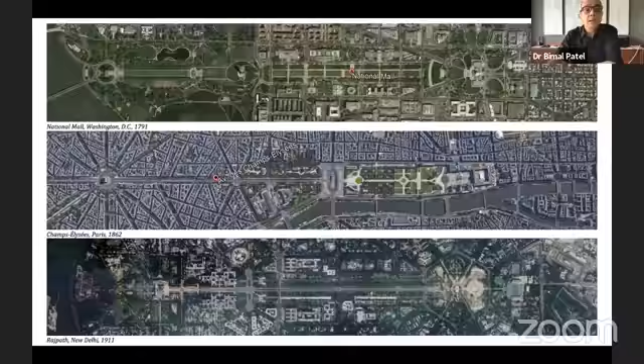The architectural device that the architects used was a standard Beaux-Arts device: set up an axis, with a processional route in the middle. There are gardens on the two sides, these are the flanks, with a focal point at one end and a termination point for the axis at the other.

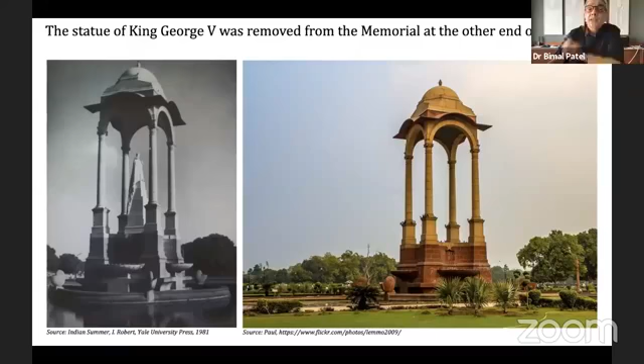North and South blocks started housing the most important ministries of the government of India. And that is how Central Vista became an icon for the government of independent India.

Now, second, the post-independence management of the Central Vista. Though this was a terrific architectural achievement, after independence, the incomplete parts of the Central Vista were developed haphazardly, without a comprehensive vision and without an inspiring architectural vision of what this place could be.

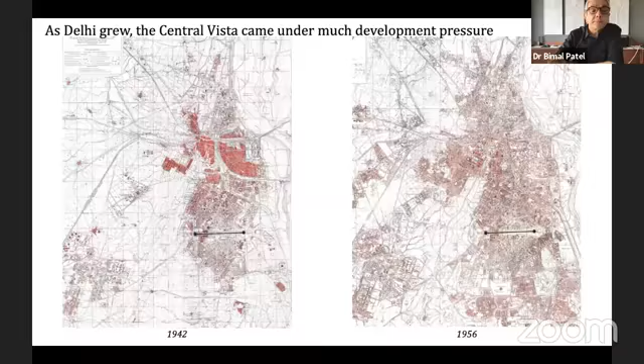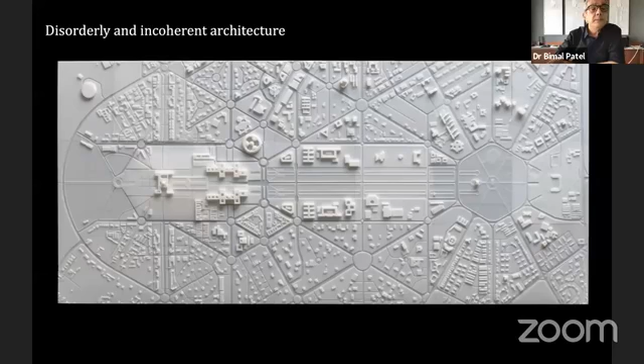If one were to look at the Central Vista today, it's quite clear that the development on the two sides is disorderly and incoherent. The architecture is disorderly - the grand symmetry set up by Lutyens has been violated in many different ways. All the buildings are different from one another, and the overall architecture is disorderly and incoherent.

This place was meant to have all the offices of the Government of India, but less than half the ministries of the Government of India are actually located within the Central Vista. The rest are scattered all across the city. You can see these yellow dots scattered outside. Inside the Central Vista, there's only 22 out of the total 51 ministries.

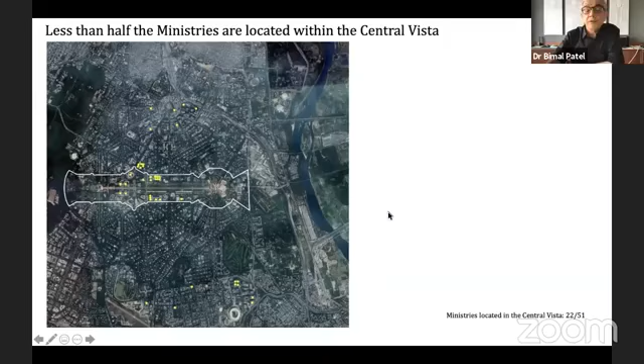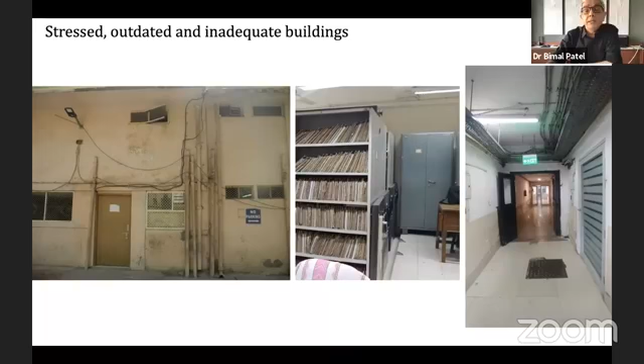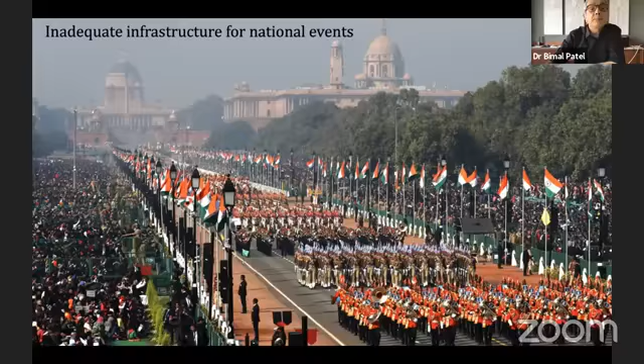If you look at the landscape of this vista, it's quite lackluster. This is not really the kind of landscape that's good. The infrastructure needed for the Grand Republic Day parades is also very poorly organized in this area. The Republic Day arrangements take very long and damage the landscape every year in the best months of the year. The facilities for civic users in the gardens are very poor also. Lots of tourists come to this area, and the facilities for tourists are also quite inadequate.

The Central Vista in the middle of New Delhi, while it's the most important architectural icon for the country, is nothing like the inspiring Capitol complexes of the world. If one were to go to Washington D.C., the National Mall, and spend a day there, it would be a comfortable and extremely memorable experience. Likewise, if one were to go to Canberra in Australia, there too they have a long vista, and this is a magnificent place. And certainly for those of us who have been to Paris, the Champs-Élysées is a magnificent example of what public spaces in the middle of cities can be like.

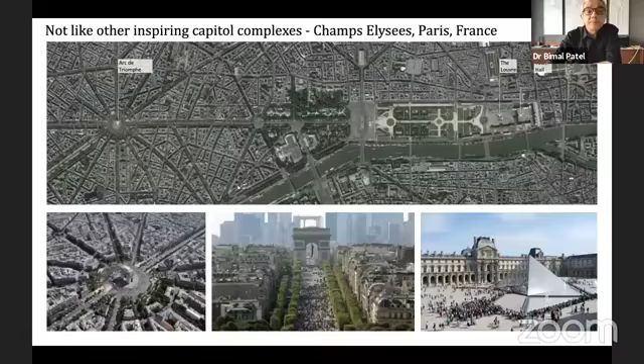Over the decades, many people and institutions have demanded that the Central Vista be better administered, better developed, and better maintained, and that its heritage should be protected. However, nothing has been done for all these years. It is only now that the government has decided to act on these demands, and it has structured a comprehensive reimagining and restructuring of the Central Vista.

So let me explain the project to you. But before I do that, let me say a few things about the master plan. It started with a sketch developed in response to very broad requirements and minimal information about the site. Most architects are familiar with this situation. When clients come to them, they have very broad requirements and very little information really to start with.

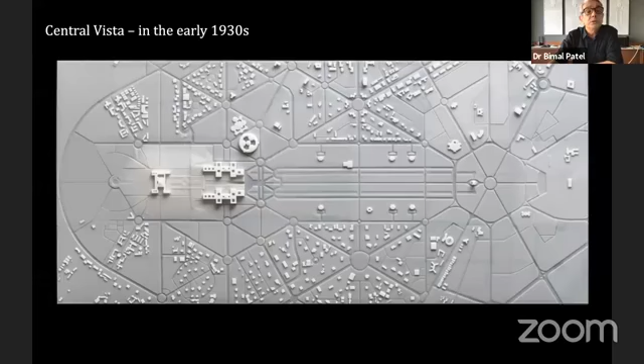It is through the process of design that these things get finalized. We started off with this initially available map of the plotting plan, which is very rudimentary information. Fortunately, there are lots of fantastic historical studies of the Central Vista, and we were able to dig into these books. We had historic maps to look at. Thank God for Google, because these days large amounts of information can be gleaned about any place. Based on the information from Google and the historical maps, we were able to reconstruct the terrain of the area and make a model of this sort in our office.

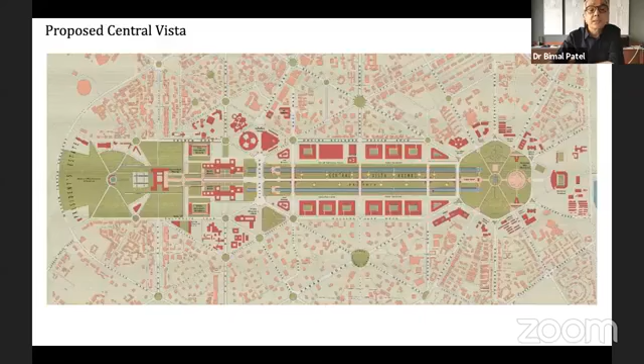Since the first sketch was developed last October, the master plan has evolved much. This is October 11th when we submitted it. Then as we started working on it and finding more information, it started evolving - that is 4th of November, 24th of November, and 12th of December. And the master plan has continued to evolve as we go along - that's the 15th of March.

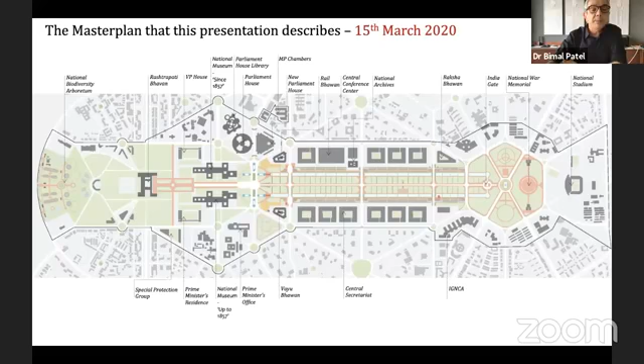The master plan will continue to evolve as we consult more people, discover new facts, and see previously unforeseen opportunities. This is the nature of such large projects, that slowly over time, their design gets better finalized and brought into focus. What I'm going to describe today is the 15th of March 2020 plan as it stands. I don't expect huge changes will come about in the months to come, but there will definitely be small changes as we go along.

We started this project by understanding the existing facilities of the Parliament. We all know it's a round building - you can see it here. Once again, to orient you, this is Rashtrapati Bhavan, this is North Block, this is South Block, and here is the existing Parliament building.

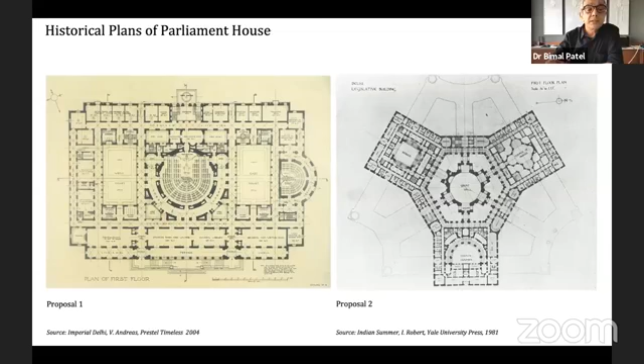We started out by studying the historical plans of Parliament House. The round building was not the first option Baker worked out. First, there was a rectangular building, then there was a triangular building. He was quite in favor of this sort of triangular plan, but eventually Lutyens prevailed upon him to make it a circular plan.

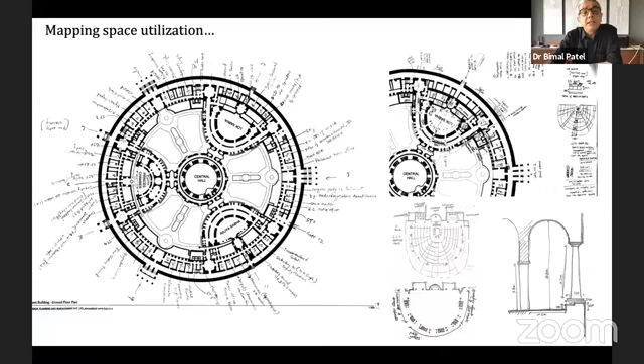These drawings were also made to better understand the existing facilities architecture, and then we studied how the space is used in the building. You can see here some sketch notes from the site visits of all the people in our office who visited, and we studied each and every space and what it is used for.

We studied all the furniture here. You can see this is the benches in the Parliament. We studied that to figure out what the seating arrangements are like. This is the library. We studied the library furniture and what it is like.

We studied the expansion possibilities. One of the main requirements of the client was that the Lok Sabha is likely to be expanded in the coming years. Today, we have about 545 members, and in the future, we are likely to have up to 800 or 900 members in the Lok Sabha.

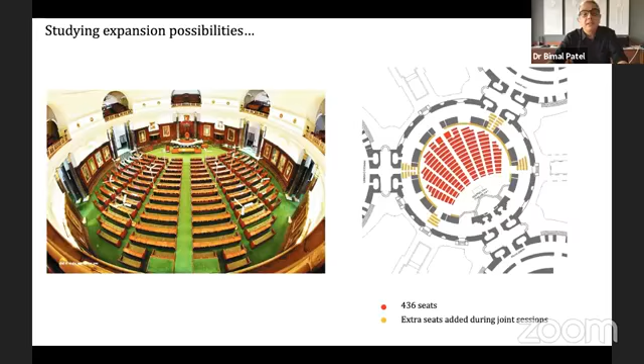If you look at the infrastructure of the present parliament, just a look at the pictures will make it clear that this is all rather antiquated technology. The microphones are of old type. They cannot be switched off, so there is a lot of noise and the acoustics is extremely poor.

In addition to this, nobody can certify today whether this building is earthquake safe or not. And remember that in past years, Delhi's earthquake risk has been ratcheted up.

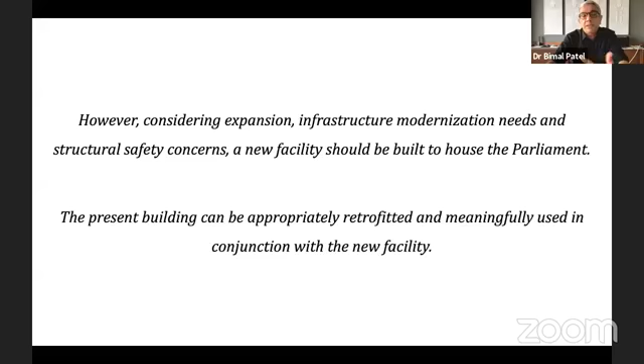Now, after all this study, the conclusion that was very inevitable and clear was that Parliament House is a much valued facility and a symbol of India's vibrant democracy. It's a very important structure for India's democracy. However, if one wants to expand the seating in the 2 halls, modernize the infrastructure, and address the structural safety concerns, a new facility will have to be built to house the parliament. Once this is built, the present building can be appropriately retrofitted, and the 2 buildings can be used in conjunction with each other so that together they become the ensemble of the Parliament of India.

So we started working on the design for the new facilities, and it seemed absolutely appropriate to house it right next to the present parliament in this triangular plot. Now, mind you, on this plot next to it, we decided to put a triangular building.

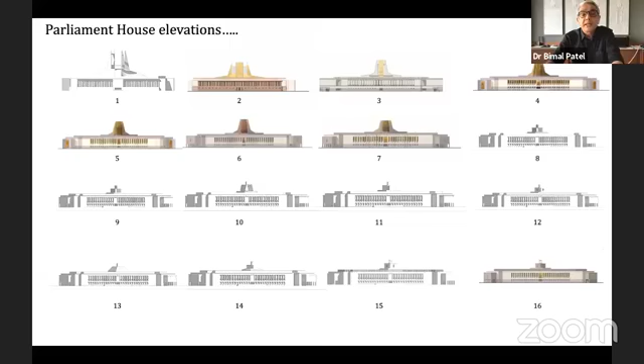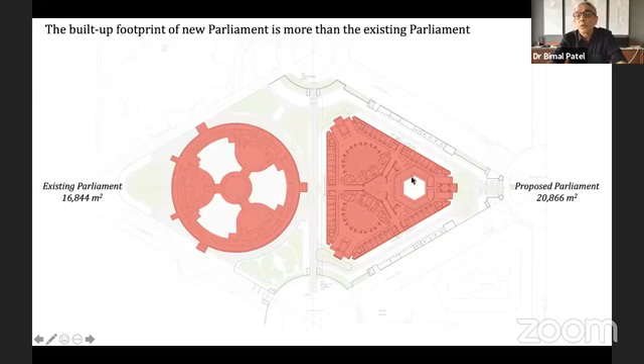You can see here the two buildings. One of them has a ground cover of 16,000 square meters. It has large courtyards in the middle - that's a round structure, you can see. And on this side is the new facility that is planned. It also has a courtyard, but a smaller one, and so it has about 4,000 square meters more of floor space on the ground. But otherwise, they're similarly sized structures.

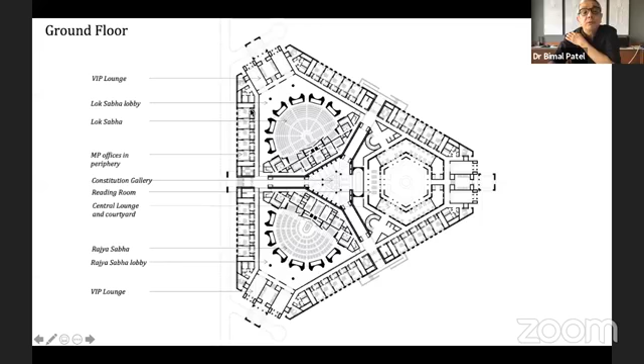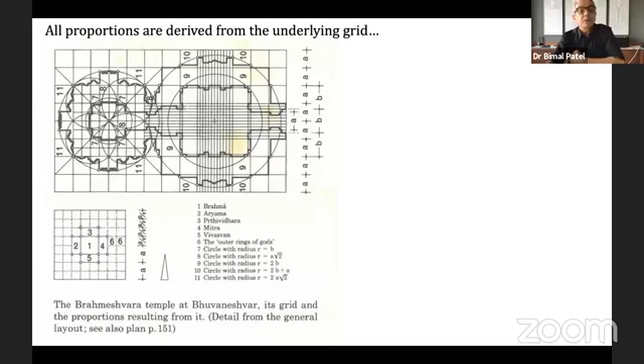What's important here is that the entire building has a rigorous underpinning geometry. Many of our iconic structures have rigorous geometries underpinning them. This is a standard feature of most sacred buildings, of memorable iconic buildings. Temples have geometries underlying them, and it's transformations of that geometry that lead up to the final structure.

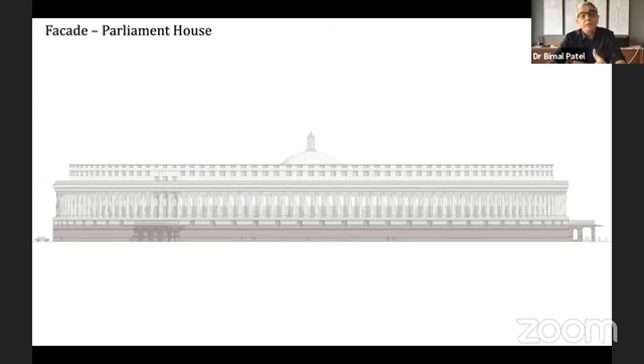The aesthetic sources and references for this building are, of course, the old Parliament building. The old Parliament is a much valued structure. The two, we want them to work together, and so this becomes the big reference point for us.

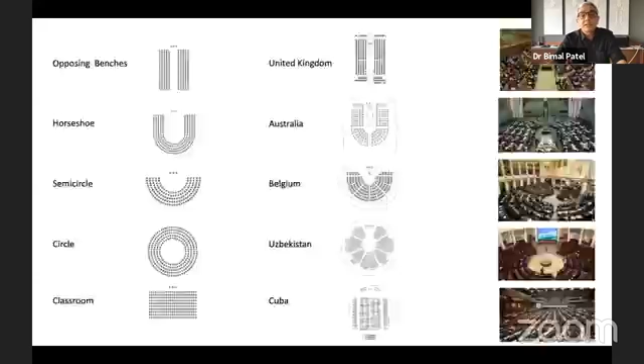The seating layout in the Lok Sabha and Rajya Sabha was of much concern. We studied many different seating layouts across the world. For example, in the United Kingdom, you have the famous opposing benches. In Belgium, you have a semicircle. In Cuba, you have a classroom type seating.

We decided to continue with the horseshoe-shaped seating that we have in the present parliament, and our new one has a similar sort of seating arrangement.

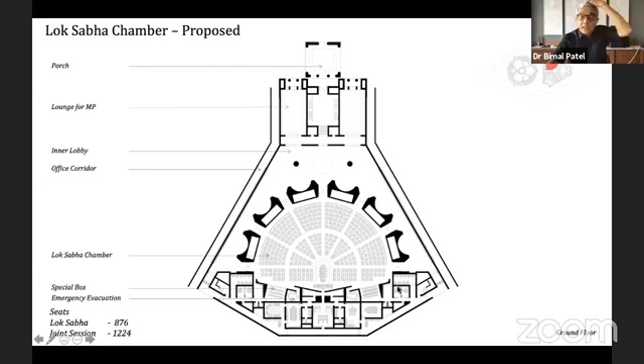These are lounges on the two sides, because when the Lok Sabha proceedings are going on, members spend many long hours here, and nobody else can come in. This whole area at the back are the various administrative offices of the Lok Sabha, with the Speaker's office and other administrative offices needed for its functioning.

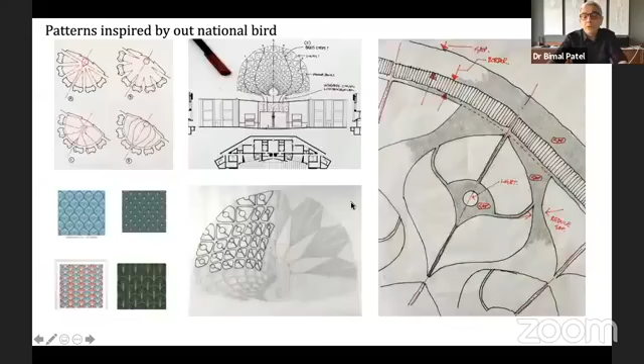The Lok Sabha chamber, for all the patterns we are using, draws inspiration from our national bird, the peacock, and that's something used in all the patterns here. These are sketches from the textile and the false ceiling that we are going to do for the hall, etc., all inspired by the peacock.

Those of you wondering why there is no joint session hall in the new facility—this Lok Sabha hall has been designed such that at any given point of time, the largest seating capacity is 876 seats, but the seats have been designed large enough so that these will hold actually 1,224 seats when joint sessions are held in this hall. So that will also be held here.

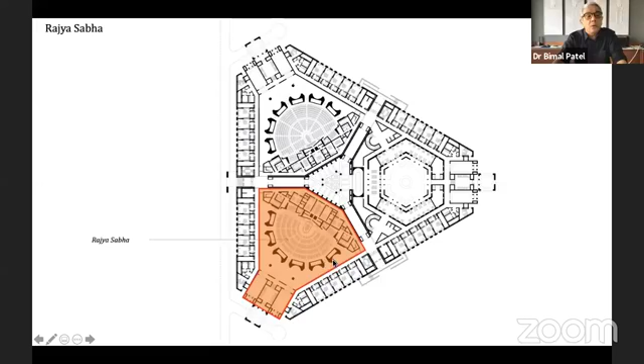The Rajya Sabha is a similarly shaped hall here—you can see the orange colored area is the Rajya Sabha. That's the Rajya Sabha hall. Similar to the other one, you have the seating in the middle. That's the chamber itself, that's the lobby outside, and that's the Honorable Chairman, the Vice President's chambers and offices on this side.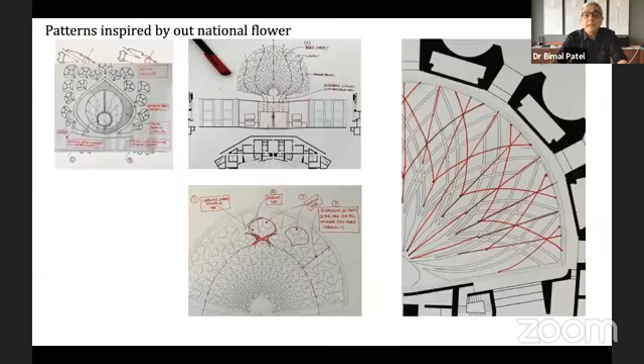This one is based on our national flower, the lotus, and here we have patterns that we have used for that in the false ceiling, etc. This is an image of the Rajya Sabha chamber, similar but different from the Lok Sabha. The colors, if you're wondering, red and green are the traditional colors, and we have continued with those, and everybody wants to continue with those.

Once again, I'm not going through everything here. You can see that the seating arrangements in the Lok Sabha today are actually pretty cramped—there are benches of this sort. The members don't have a desk in front, do not have any place where they can place anything they want, they do not have modern equipment, and they have to walk in front of other members if they want to get to their seat in the middle. So corner seats are prized, and it's a very, very cramped arrangement—cozy, one might say, but also inadequate from a facilities point of view.

The new seating that has been proposed has benches with only two people to a bench. This is the arrangement in many of our state assemblies today. And in this case, if two people come on one bench, and as I told you, when there is a joint session, there'll be three people—these benches are large enough to hold three people. Similarly, for the Rajya Sabha, the seating arrangements have been improved much. Here are a couple of pictures of the sort of furniture being developed for the area. The technology, of course, will be highly upgraded.

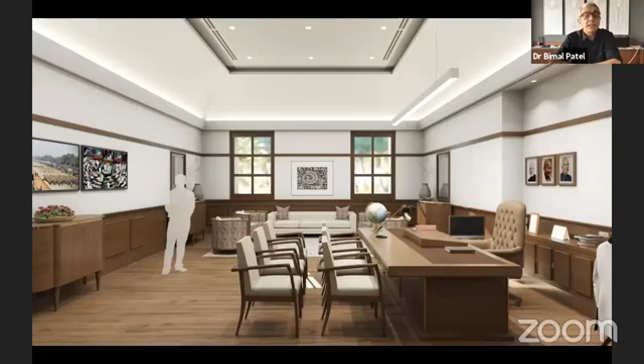Now ringing the entire building are offices on all sides. There are 120 offices. The lower ground and ground floor offices look like this. All offices have natural light and ventilation, which is not the case in today's offices in the present building. Here is a view of one of the offices, and this is one of the corridors leading up to the different offices.

On the third vertex here you have the central lounge and courtyard. This is a view of the lounge that will be there for the MPs, and this is where the members all hang out. This is an extremely important space for the parliament because this is where all the informal meetings and discussions happen, and members of parliament get to bring their guests here and meet with them. They're not allowed to take them into the main chamber at all.

That's the courtyard in the middle of the building where we want to put the national tree, a large banyan tree, and you can see the lounge is arranged all around it. At the back here you have the library.

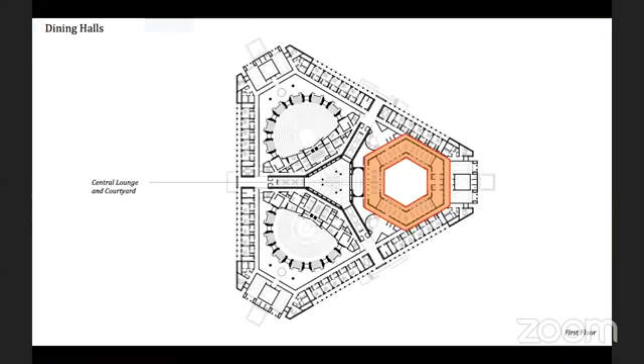On top are dining facilities, because many members spend whole days here, even going late into the night. On the right-hand side you can see the dining facilities on top, and that is what they will look like. Here is the library of the new parliament, and this is not really a full library. It's only a place for people to sit down during the day and work on their notes while the sessions are going on.

This has to be located right next to the hall because they have to rush in for voting whenever voting is announced. Now, in the center of this building is the heart of it, the sanctum sanctorum, the Garbhagriha if you want. It's called Constitution Hall. There are three parts to it.

The first is these three approaches leading up to the center, which will have public galleries of this sort, with some displays for all the visitors, children, tourists, and members of the public who come here. These will be galleries with exhibitions of material related to the parliament and the constitution.

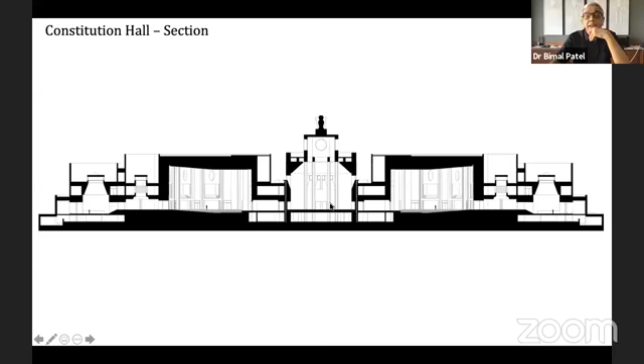In the center is what we call the Constitution Hall. This is a memorable, evocative space right in the middle with lots of light coming in from top. It has sculptures of parliamentarians, with light coming in on top, and this in a sense represents the cosmos. This will have images representing the diversity of India, and below is the level which has the level of governance, as we call it.

Here you can see another image of the central hall, and that's a view of the ceiling there, with natural light flooding in on top. This is one of the images that people who come visiting here will carry with them.

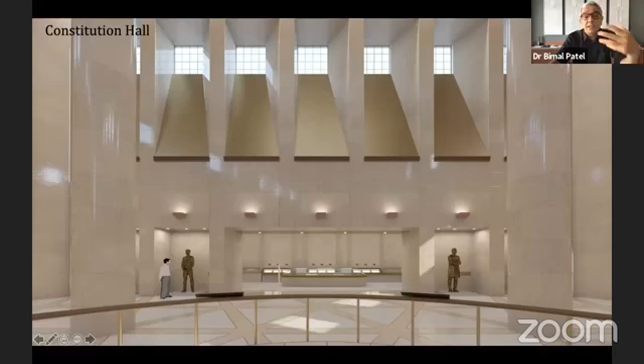At one side of this is a very important space called the Constitution Gallery. This is the place where you can see the Constitution Gallery, and this is where the Constitution will be displayed. This is the Constitution of India displayed in a glass case, and you can see that is the Constitution Gallery where this document will be displayed.

After all, this is the most important evocative space for our parliament, and this is meant to give people who come here something memorable that they carry with them as an image of the place. Of course, this has natural light flooding in from top and various other things.

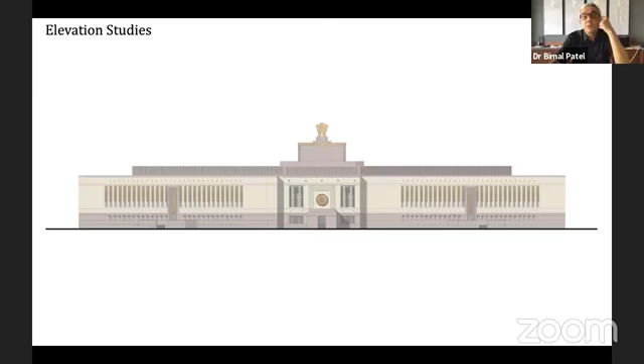These were studies that we did for the elevation, and I'll leave you with a couple of images of the final elevations that have been worked out here, as you can see. These are the two buildings right next to each other.

I've taken a lot of time explaining the Parliament House because the design for that is most underway. The rest of the buildings are also being developed, but I'm not going to spend so much time on them. Coming back to the master plan: this is the old Parliament, here is the new one, and right next to here, part of the master plan is a proposal for chambers for members of parliament.

These are offices for all members of parliament, 1,000 offices in the plots, which presently have some ministry buildings that are to be located inside these central secretariat buildings later on. I don't have much more to add about the chambers of parliament for members of parliament just now.

Now, the second objective of the Central Vista project is to improve productivity and efficiency of administration. The way of doing this is to create a central secretariat with modern office facilities. When I talk about the central secretariat, it is these buildings that I'm referring to here.

That's the whole secretariat. Now, presently, the ministry offices are located all over Delhi. Some of them are in the Central Vista, and the 51 ministries house approximately 51,000 employees. Some of them sit in the Central Vista, others are spread across Delhi. 22 ministries, to be precise, with 41,000 employees are presently working within this dotted area, which is the Central Vista. The remaining employees and ministries are located outside.

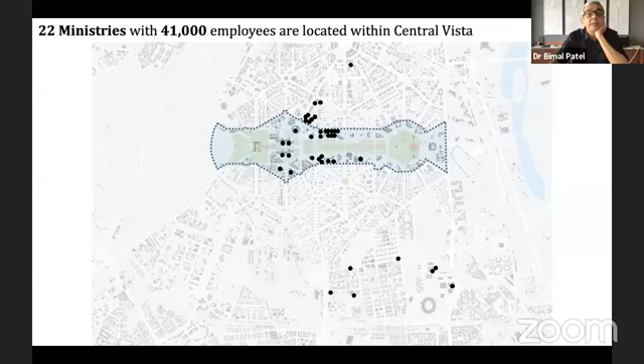If you look at the ministry buildings presently, they are all located in these areas here on the two sides. And the office buildings along Rajpath are of extremely poor quality at this point of time.

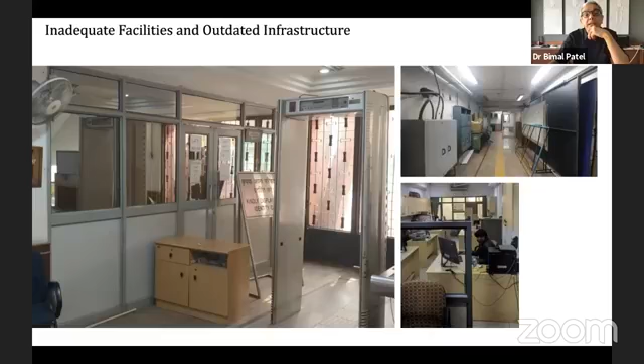You can see here that there is very inefficient use of land. Parking is haphazard. If you look at the insides, the infrastructure is also outdated and the facilities are very inadequate. There is no coherent identity to all of these buildings.

It is very clear to anybody that the scatter of offices and the quality of present office buildings are not conducive to efficiency and productivity of administrative functioning. So improving productivity and efficiency of this area by building a central secretariat is one of the key aims of this project.

Now, as architects, all of us know that the kind of workspace you work in determines the productivity of organizations and determines the efficiency and sustainability of organizations. That is why every year there are new books produced about what offices should be like, and office architecture is of extreme importance. Rationality is important, efficiency is important here, and we all know this quite well.

So today, organizational efficiency, represented by this vertical arrow here, is low, and organizational productivity is also low. This is the area in which you can say we are presently standing. The aim of this project is to build a central secretariat and improve organizational efficiency and productivity by improving facilities management, furniture layout, services, spans, new buildings, and even the location of buildings.

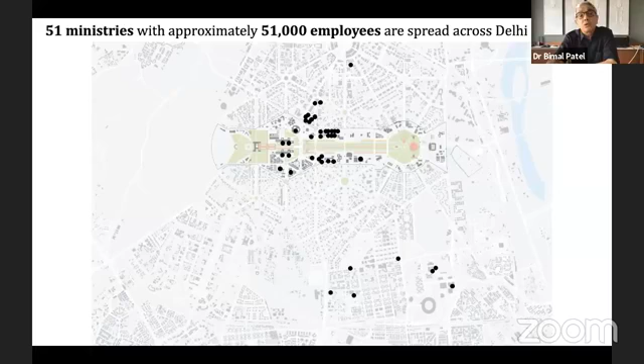So I already showed you this diagram, which shows that 51,000 employees in 51 ministries are spread all across Delhi. I told you that 22 ministries with approximately 41,000 employees are within Central Vista. Now, the interesting thing is that within Central Vista, there are also 9,000 defense personnel working, these orange spots you can see here, in these hutments and barrack structures.

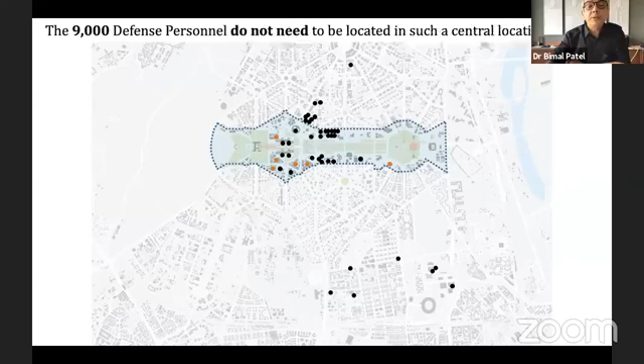There is no reason for them to be located here. These are very central locations, but these employees of the defense departments can be working in other places also. So the first thing that is being done for these 9,000 who do not need to be located in this end is to move them out of here into new offices that are being custom built for these people.

So out of the total, 9,000 employees will move out of the Central Vista, and the ministry offices which are outside will be brought into the Central Vista. So 9,000 will move out, 10,000 will come in, and the total population will be 51,000. The important thing to note is that the transfer will increase the total number of employees in the Central Vista from 50,000 to 51,000. So the population increase in the Central Vista is only going to be 1,000 in a total of 50,000 employees. It's not the number of people who are increasing, but people who are located poorly outside who are being brought into the Central Vista in these 10 buildings that you can see.

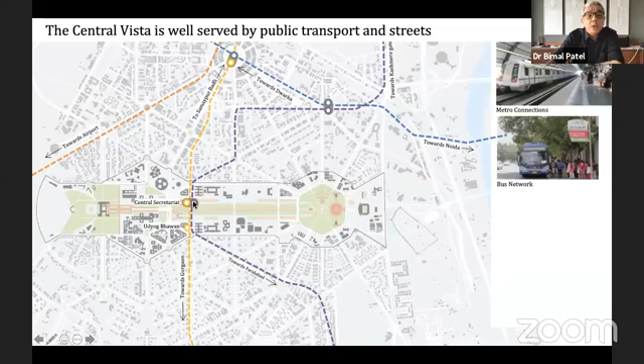Now, what is proposed is that once these office buildings are built, there will be an underground people mover built in a loop all around below the ground level, which will connect the metro to all of these buildings.

For those of you who have traveled abroad and gone to airports such as Dubai or Singapore, you may know that moving from terminal to terminal is often done in this sort of underground shuttle. It's simple, not on rails, it actually runs on rubber wheels, and it's an electric vehicle that moves people in automated carriages around.

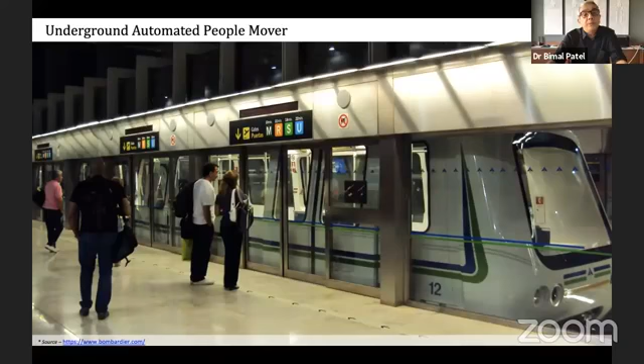This, for example, is from an airport, and you can see this is how people can be moved. So people would be able to get out of the metro, get into one of these people movers, and get to their office building, which would be a kilometer away, but at top speed. So there would be a lot of incentive to use the metro, and a large portion of the employees will be able to use public transport. So it's a totally transit-oriented development.

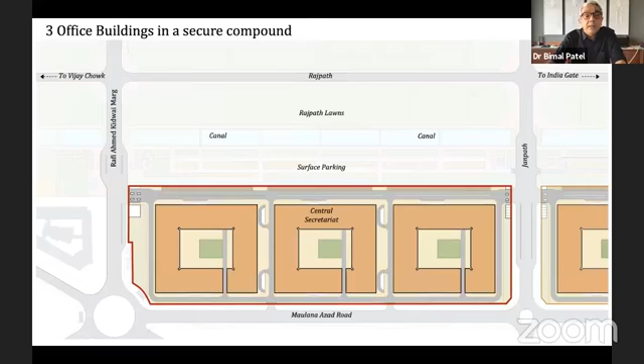If I were to zoom into one of the plots here, plot 3, then inside one plot there will be 3 donut-shaped buildings, 1, 2, and 3. Each of these buildings has a courtyard in the middle, and it's an efficient ring all around. There will be a road all around it inside the fence, an internal loop road through which you will be able to access all the buildings. Even today, there are such loop roads around the present buildings.

There will be some parking for visitors at this level too, and then these are the points at which you will get entrances and exits, and fire entrances also need to be provided in this area.

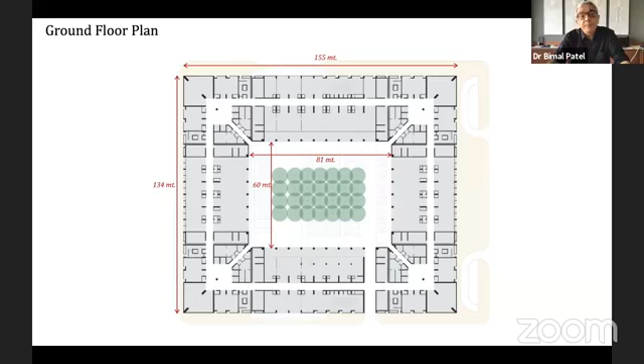If you take one building and zoom into it, you can see it's a donut-shaped building, a large building, 155 meters by 134 meters, with a large courtyard in the middle, 81 meters by 60 meters. You can see some trees planted in the middle.

As you come here on the ground floor, I'll just quickly go through this plan. These plans are a picture of efficiency. These are rationally planned office buildings.

When you come in here, you get entrance lobbies. This is the circulation through the entire building, and this is all the vertical circulation, the staircases and the elevators. You can see here the cafes at the ground floor level. These are the services, the toilets, the infrastructure services, and at the far end are all the common shared amenities like conference halls, etc. And here are the office buildings. The ground floor has few offices, but more common facilities.

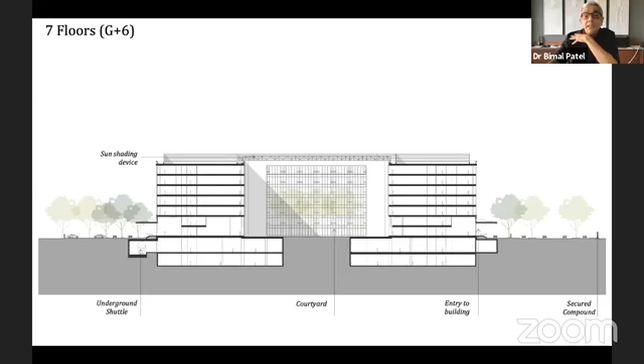If you look at the cross section here, you can see the basements below and various other areas. This is the courtyard in the middle without the trees, and this is what the courtyard will look like after the trees are done. From the outside, the building will be stone clad and match with all the Lutyens buildings. The courtyard itself will be steel and glass and will have large trees so that all the offices overlook the courtyard, and the courtyard itself provides a shaded place for people to have lunch. You can see that the buildings are approximately the same height as the present buildings.

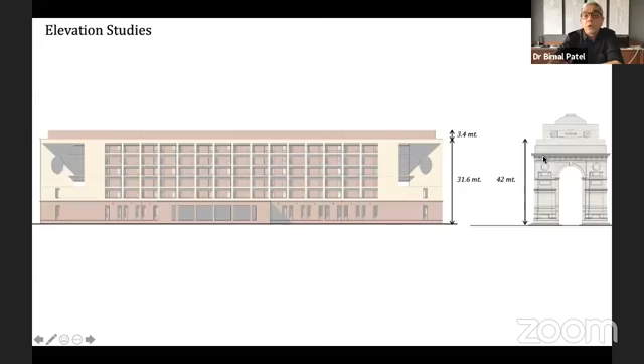If you take a cross section right through here, you can see the basements, you can see the courtyard, and some sort of covering over the courtyards like the Habitat Center covering. These designs are still being finalized as we talk. Here is one study elevation from the outside. You can see that the buildings are all designed to be lower than India Gate, which is 42 meters high.

The Central Conference Center is an important part of the Central Secretariat. It's going to be located here. Presently, there is something called Vigyan Bhavan, which has some conferencing facilities. They are not adequate for present day needs, and they are not modern facilities. A central conference center will also be built along with the 10 office buildings. That's where it will be located.

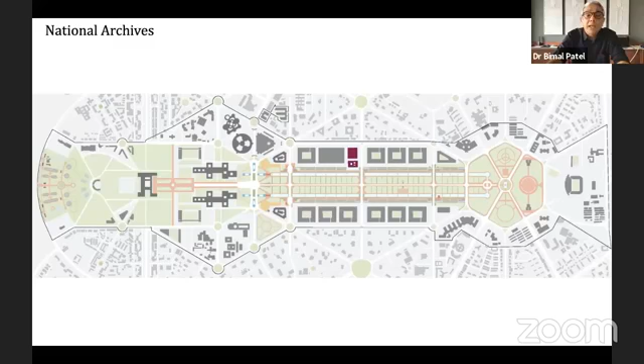The archives is an important building, this is where the documents are stored. The archives is an old heritage structure, and it has been added to later on. That addition will be removed. The old heritage structure will be kept, and a new addition will be made to have better improved offices for the archives to function. So that's the old heritage structure which is going to remain, and this is the new structure that has been put in place, which is to be removed. This is the old heritage structure, beautiful architecture from the inside.

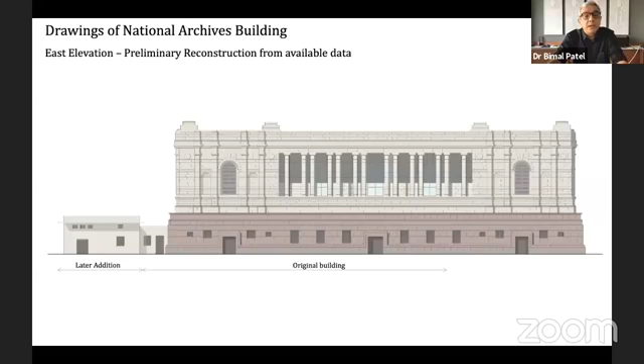This will continue to be the archives, the National Archives. The storage facilities of this sort and very many other facilities inside are to be modernized. These are some old structures. The old structure will be retrofitted, improved and cleaned up to bring out its older glory. You can see that's where the National Archives will be.

So together, the offices, the 10 office buildings, the central conferencing facility, and the National Archives will form the Central Secretariat. That is where the administrative offices of the Government of India will be located.

Now, the third objective of the project is to provide adequate facilities for the Vice President and the Prime Minister. Presently, the Vice President's residence is located here on the Central Vista. It's not the best location for the Vice President. If you look at the facilities themselves, they are not adequate and up to what is needed for the stature of the Vice President of India.

They are disturbed by all the activity around, and the movement of the Vice President also disturbs all the activities around. So what has been decided is that this plot here, north of North Block, which presently has hutments and barracks with army defense offices, these will be moved out, and in this plot will be the Vice President's residence.

It is in a tucked away location, not very visible from the outside. Any case has to be in a secure area, and it is in this place that the Vice President's facilities will be built. I don't have much more to add here. Work is still ongoing for Vice President facilities. Facilities for the Prime Minister.

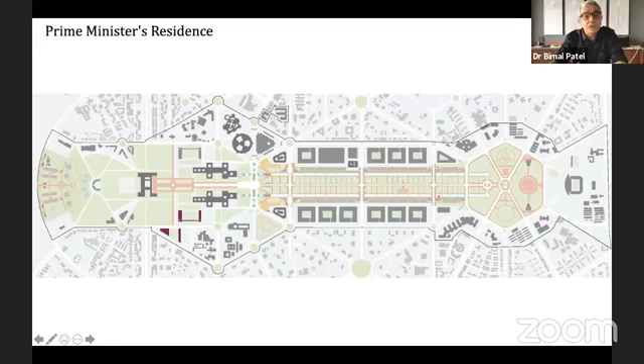The hutments in this diamond-shaped plot, I told you is the Parliament. This diamond-shaped plot has hutments in it. Those hutments are not residential, they are office hutments. Once again, these hutments are very centrally located right next to North Block, South Block, Parliament, etc. These have army offices which do not need to be located here. There are training colleges, etc. here. They are being located elsewhere.

And this is where the office of the Prime Minister of India will be located. Presently, the Prime Minister's office is located in South Block in this little corner here, but now it will be located here. And this will be a garden attached to this facility. So the third objective, as I said, was providing adequate facilities for the Vice President and Prime Minister.

The fourth objective is to refurbish and better equip the Central Vista Avenue itself, the public space of the Central Vista. That's the middle space I'm referring to. That also is a grand setting for national events, where the Republic Day Parade is held. This is an important civic garden for Delhi's residents, and a great tourist attraction. As you can see in this picture, you have India Gate here.

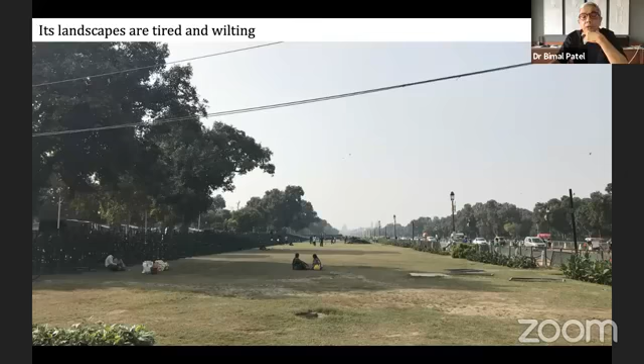Now, if you look at the Central Vista closely, you will see that it is under much stress and in a state of disrepair. Its lawns and landscape are tired and wilting. You can see here the quality of the lawn. Its canals are usually dry. Many of its trees are dying because they are now very old.

The Republic Day arrangements, you can see here, take weeks on end to put up and dismantle, and they completely destroy the landscape once every year. The traffic junctions are really very busy and hazardous to cross for pedestrians and tourists. The gardens themselves have very little facilities.

People use them. All gardens in India are used, but this is not well equipped. The public conveniences - this is a toilet - there are very few, very poorly located. Tourist buses are haphazardly parked everywhere. Places need to be created for this.

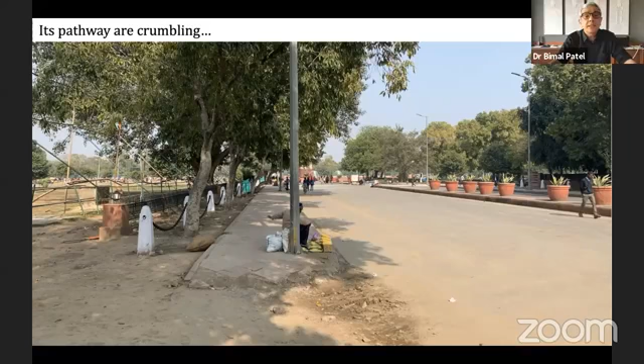The pathways you can see here are crumbling, very, very poor. You can see the kind of infrastructure in place. The gardens have walkways that are not paved, and the gardens are very difficult to maintain. The signage is uncoordinated and incoherent in most places.

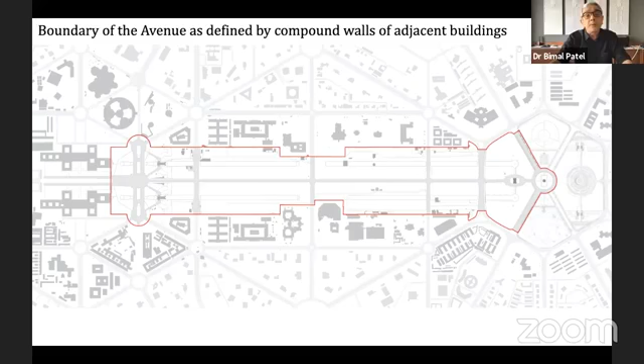But let me take you in a little more detail. First of all, the extent and boundaries. You see, this is the boundary formed by the compound walls of adjacent buildings at present. Okay?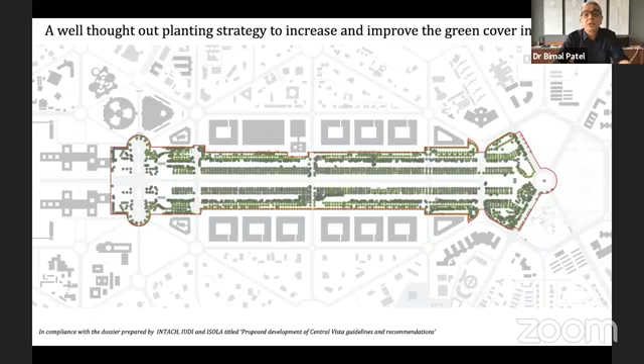A very detailed tree survey is underway. It got slowed down because of the lockdown, and a planting strategy is being prepared to address the problems identified above. Slowly, we will work out a strategy that keeps the basic structure of the avenue in place while making a good planting strategy for it.

The canals, as you can see here, are often dry. They are painted blue to give them a look, but then they look terrible afterwards. During Republic Day, temporary bridges are built on top of the canals, which destroy the canals and make them difficult to use. So these canals will be refurbished, and permanent bridges provided so that the Republic Day arrangements don't need temporary bridges, and people can cross the canals more easily even in regular times.

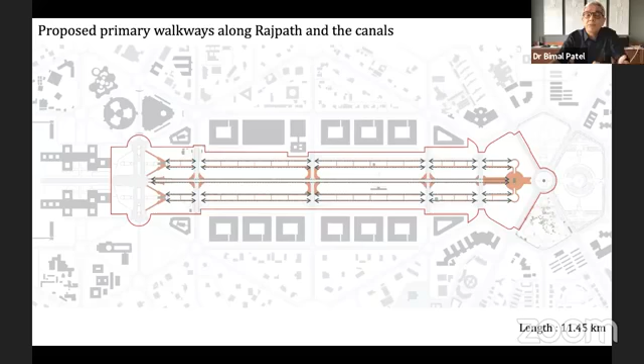The sidewalks and pathways in many places are non-existent and very poorly located. So a whole proper set of pathways, reflecting or taking off from the existing structure of primary, secondary, and tertiary walkways, is being built.

The vendors, who have no proper allocated place and no facilities, are also being provided proper places precisely where they can find business, where tourists and people can find them. Vending zones will be located in this area also.

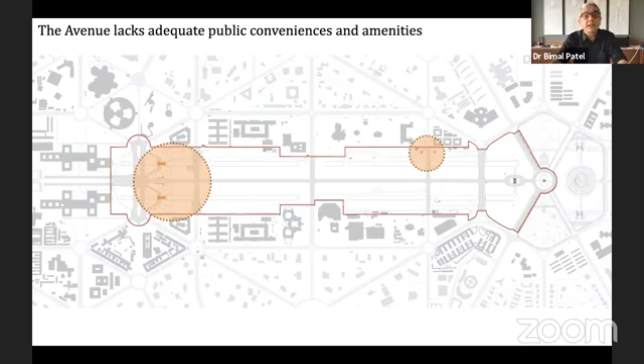Amenities like these toilets need more facilities created. Presently, amenities exist only at the two ends of the vista, a 2-kilometer distance apart. So we need to provide amenities at more frequent intervals so people can use them more easily.

This area is anyway used for parking during Republic Day parades, and in future, if more parking is required, this can be converted into additional basement parking.

This is 2 decades from now if it is needed, just like the Champs-Élysées has parking below ground. The area around India Gate is a very popular destination, but very poorly organized. Poor fencing, there's a road here, it's not a nice area.

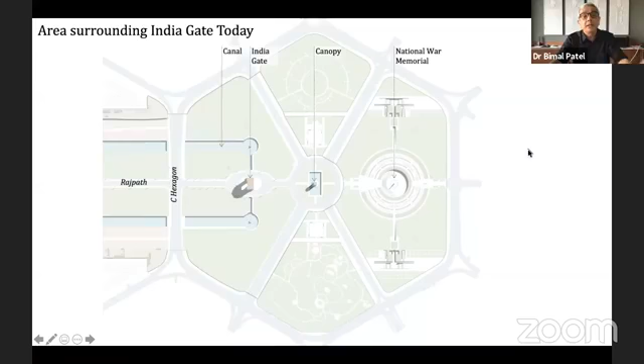The landscape is being improved in this area, and the traffic junctions are also being improved so it's easier for visitors to cross. We would like to do underpasses so traffic can move while people enjoy the vista, and pedestrians can go below. This is what is planned here.

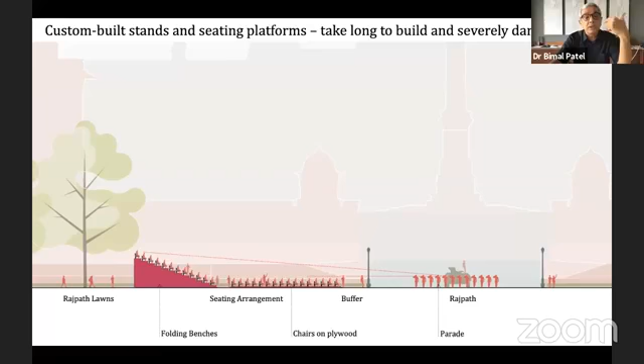Brick and mortar stands are built every year and broken down, every year and broken down. Instead, we are planning to use retractable bleachers that can be transported to the place, brought in and brought out. They are already being used a little in some areas, but this is how it should be done. All the barricades of this sort destroy the lawns and will be removed.

This is where the fences are put up. Instead, we'll use better quality barricades and the fencing will also be organized better. And the bridges I already told you about - instead of building temporary bridges of this sort, there will be permanent bridges.

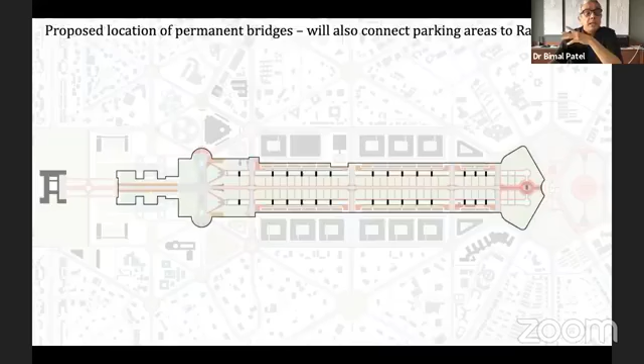Now I'm coming to the 5th objective of this project, which is to strengthen cultural and recreational facilities in the Central Vista. The IGNCA building, which is located at present in this plot, is to have one of the office plots, which is going to become an office plot. The IGNCA building will be moved to this part of the hexagon.

The hexagon will have many of the cultural facilities. It already has NGMA, and Hyderabad House on the other side. This is Hyderabad House at one side here. Across from it will be the IGNCA building.

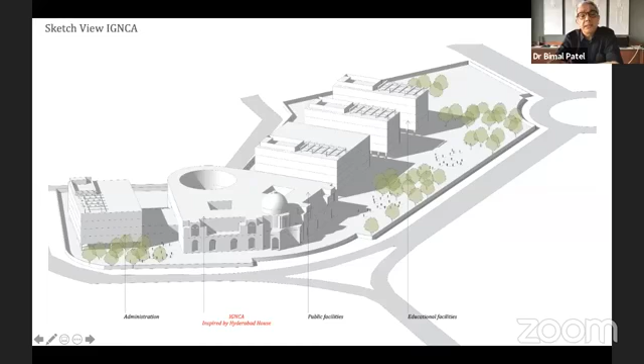Since it is mirroring this building, the new IGNCA building will be based on the plan of Hyderabad House, but it will be extended further, as you can see here. These are some tentative first blocking drawings for the new IGNCA to come up on the other side of Hyderabad House. I don't want to say more about this because work is still underway.

The National Museum, which is located in a small building here, is an extremely important institution, and this National Museum is to be moved to the North and South Blocks. This is perhaps one of the biggest moves of this project.

These buildings presently are government buildings which house the ministries of the Government of India, and they are now to be turned into museums. One museum on the South Block, the other on the North Block - both become museums like the Victoria Memorial in Calcutta, or the Louvre, which used to be the Palace of the King and has now been converted into a great museum.

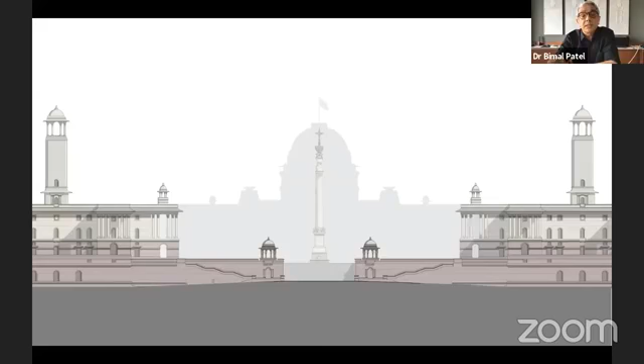In the same way, these magnificent buildings of Lutyens, which today are a symbol of the government, now become a symbol of the people in a sense. What looks like this today, someday we'll have banners proclaiming the exhibitions being held there.

People will be able to walk up Raisina Hill freely without being stopped because these are ministry buildings. So instead of standing outside on this road gaping at the buildings and what is going on inside, children of the future will be able to walk into these museums and appropriate them as their own.

So the North Block, which looks like this today - if I bring it closer, this is what it looks like - someday might have an exhibition of space, the Indian space program or something like this.

On the far end of the vista, on the bank of the Jamuna, on axis, is planned the New India Garden. This is a garden to commemorate 75 years of India's independence, with a pathway created right across from Central Vista to this area. The other end of the vista, in the presidential estate, will have an arboretum.

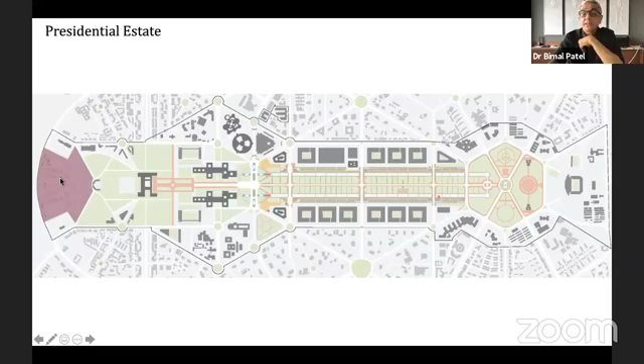Presently, if you look at the president's estate, this is what it looks like. It's about 400 acres, a vast area, and highly secure - nobody can go into this red-lined area today. Once in a while, they open it up for viewing the Mughal Gardens here, once a year.

Visitors can go in to see the Rashtrapati Bhavan, which is at this point here. Now, when this area was designed by Lutyens, this is where the main Rashtrapati Bhavan was, and here were the quarters for the people and other facilities for those who maintain it.

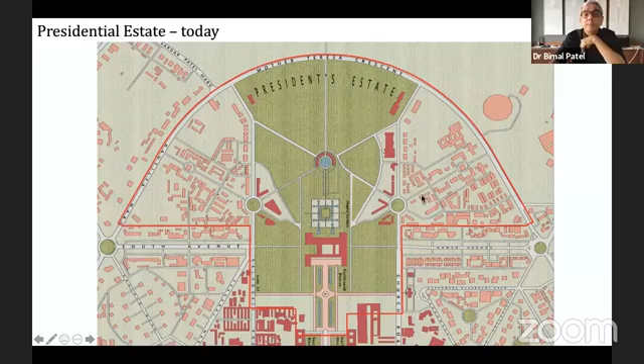Over time, this entire area has got built up with quarters. There are about 1,200 houses inside the presidential estate, that is the staff of the president. And this area here remains an open area.

The idea is to have greenhouses where the endangered plant species of India are protected and showcased. It's a learning center, not just a public garden. So what looks like this today might someday look like this, adding 50 acres of more public space in this area.

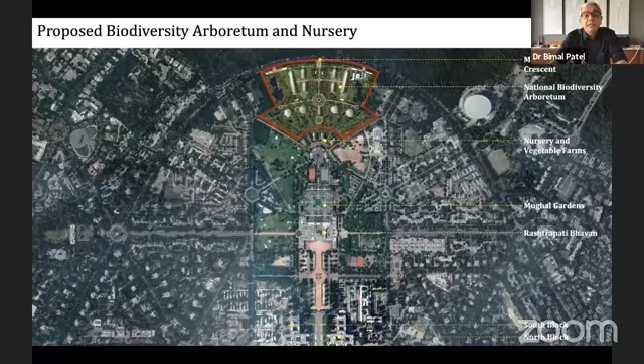Finally, I come to the end. The objective of the Central Vista project is to extend the vista and expand public spaces. I already told you how the vista is being extended. Presently, the Central Vista runs from Rashtrapati Bhavan to India Gate, up to this hexagon here.

But on the east, it is being extended by creating a facility on the Jamuna called the New India Garden. And on the west, it is being extended by creating a public arboretum at the other end. So a 3-kilometer vista is becoming a 6-kilometer vista.

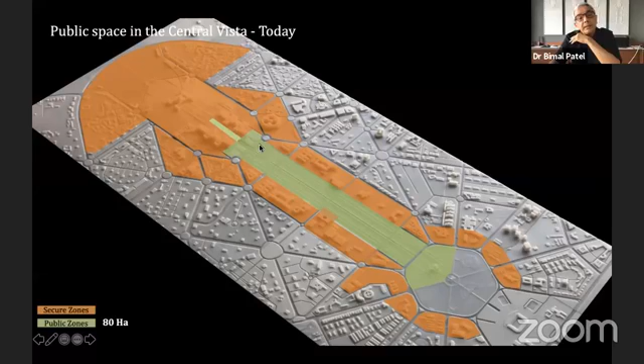These are not accessible places; people cannot walk freely into these areas today. The green area is the public area, and you can go up Raisina Hill a little bit. So this is about 80 hectares of area that is public.

In future, when this is done, the public area will be expanded so that you have this area here because the north and south block get extended, and you have this area at the back. This adds 75 acres more of public space to this area.

Along with this, the iconography of power in the Central Vista is also being transformed, because right now on the hill are the two buildings of government. These now become the buildings of the museums of India.